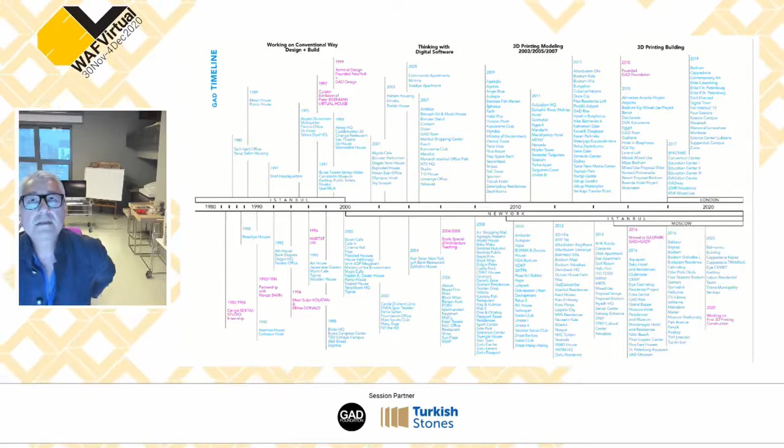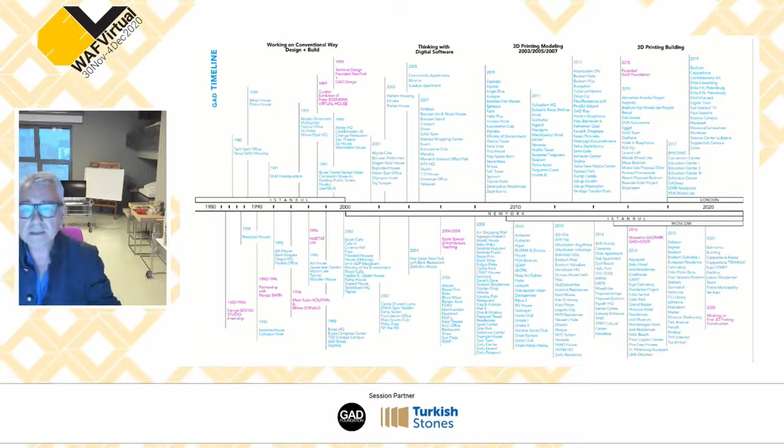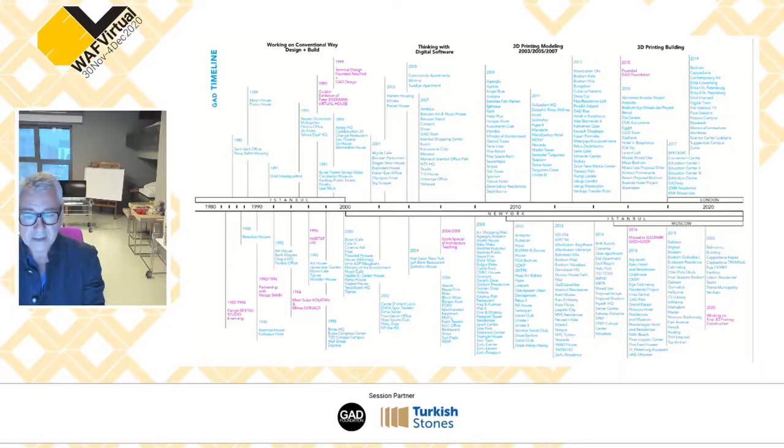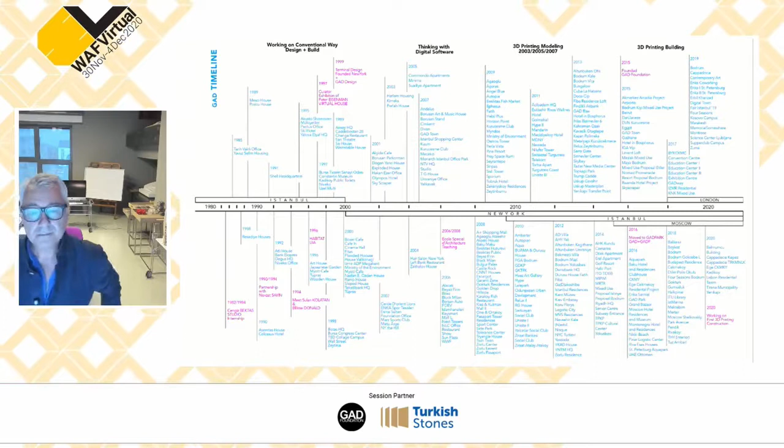Actually, first of all, I think, because when I was a small child, I visited with my family some sites, the ancient heritage spaces like Ephesus, and also Milet and Priene and Bergama, and also Cappadocia, and those kinds of places really influenced me to do something for people, or our civilization, or also explain myself.

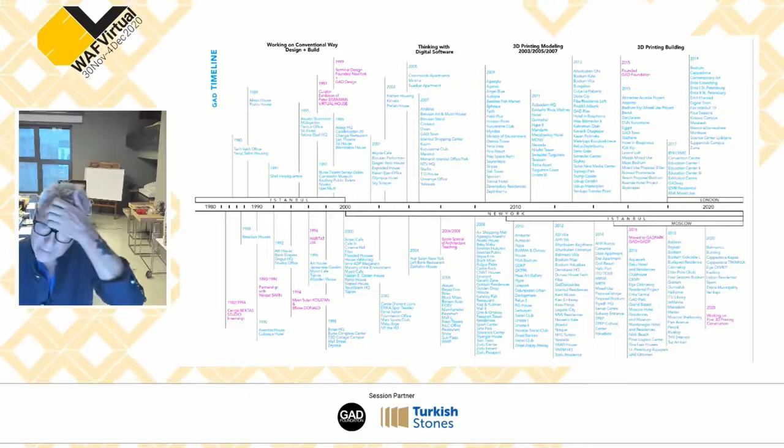Yes, actually, you can follow all the slides, please. The picture, please, next.

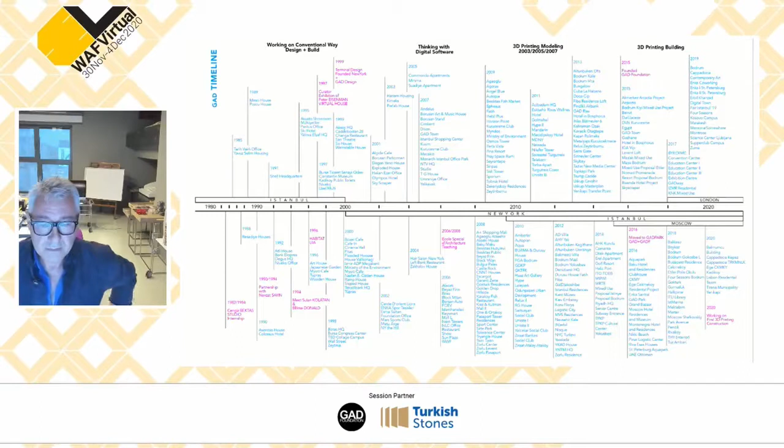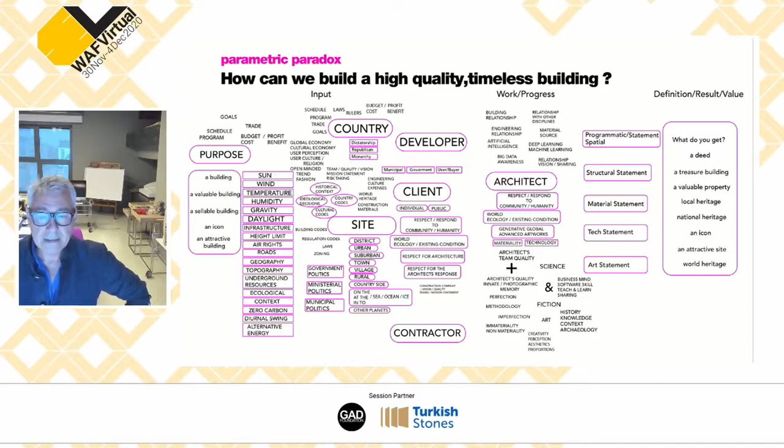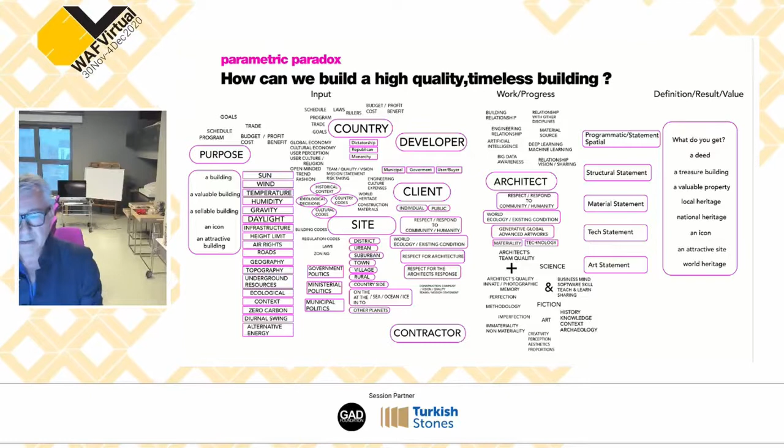Okay, what I explained before, so you can see designing something, building something or adding something on our planet is a very complicated issue, but at the end of the game, as architects, we would like to explain ourselves, our civilization, and also our idea with those kinds of statements. The stone helps you to explain your civilization, explain your idea to the next generation, because stone is normally a 30 million years old material, not produced yesterday or last week by machines. It's totally natural, and gives you ideas.

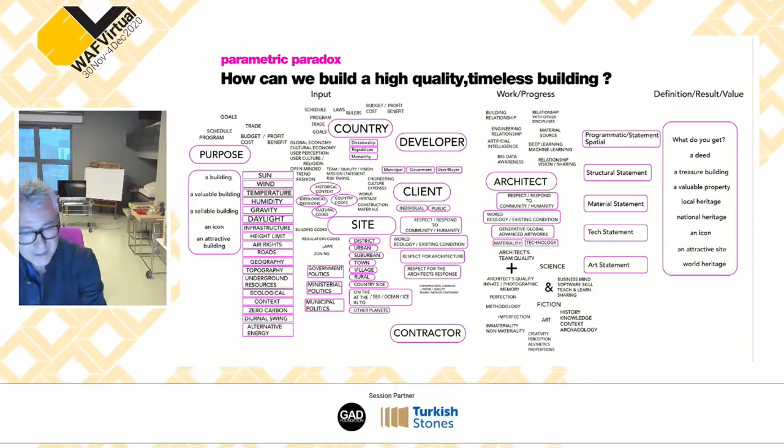Please next, please next. You can continue.

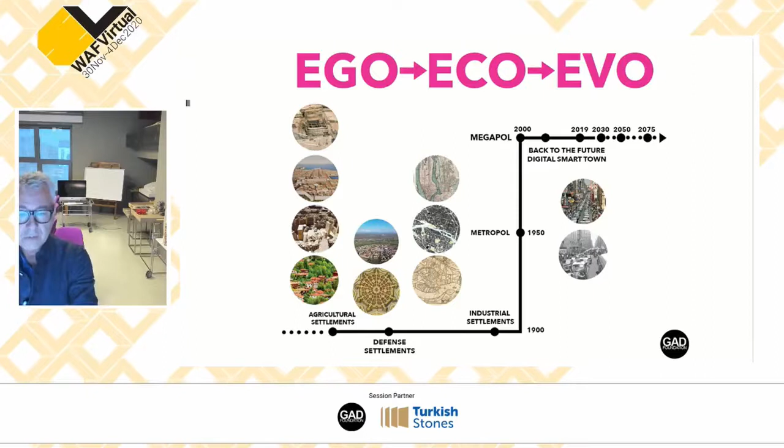And today we are interested in evolution, not only architects' statements about the ego, not the ecological things. We are interested in evolution. I would like to show you some of our projects, what we do, what we did. Please next. And we are looking now, in the pandemic time, at what is next for our future cities and our dwellings.

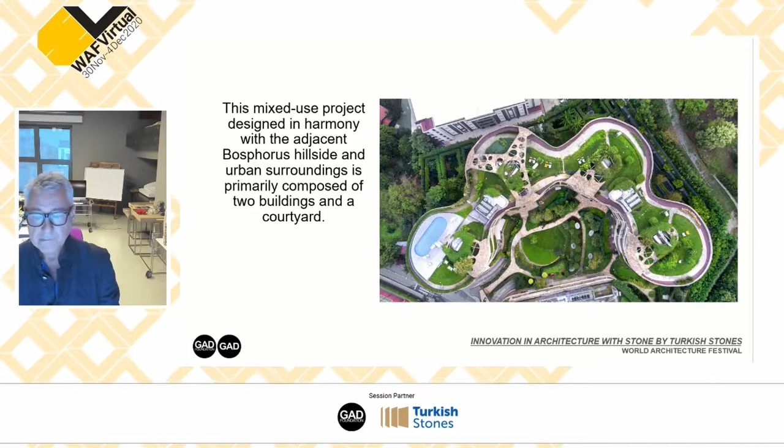We used as a material Turkish stone, let's say Anatolian stone. I prefer Anatolian stone. The name is Ünye.

Gökhan, you follow me? Try to go through this a little bit faster. Maybe Toby, if you can go automatically, just switch every 5 seconds. Yeah, let's go to the other pictures, please.

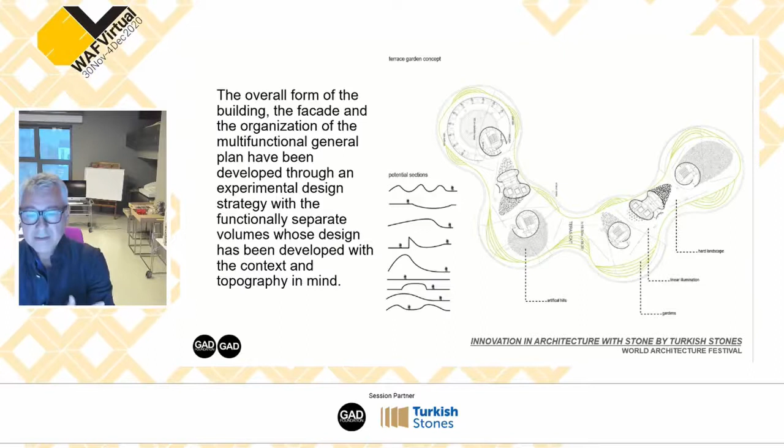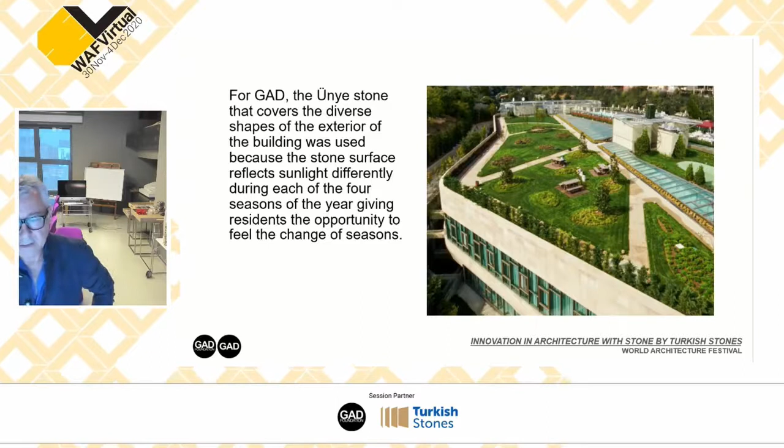You can see we made not only the housing project, we also created an envelope. Maybe it's not only the envelope, the envelope also gave our architecture not only the shape, also a garden and a 30 million years old face. Next, please.

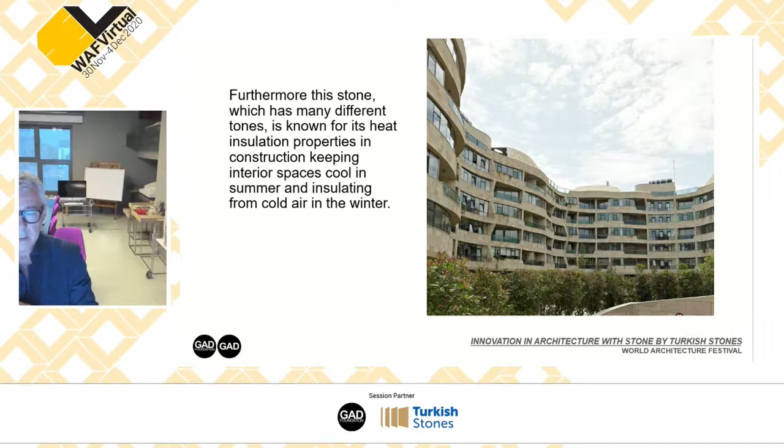Next, please. We used in those projects tools like software tools, and also physical modeling and digital modeling. And what we try to do is give more daylight, and also more daily life, not only to the envelope, also on the top of the building. You can see the sustainable life for our residents.

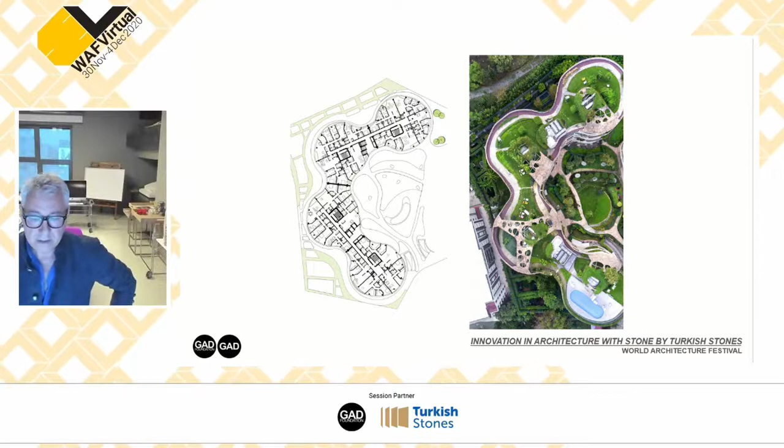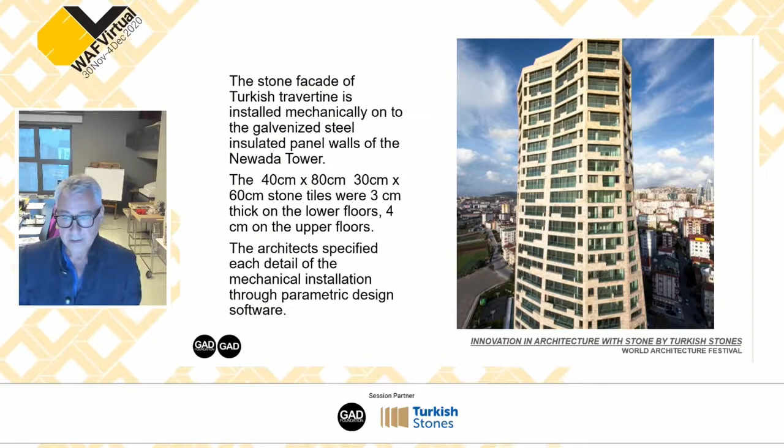Let's move forward to the other projects, I think, because time is ticking. Another project is in the same city, Istanbul. The first was on the European side; this one is on the Asian side. You can see the fantastic view, and we tried to give the building a shape, not just making a form.

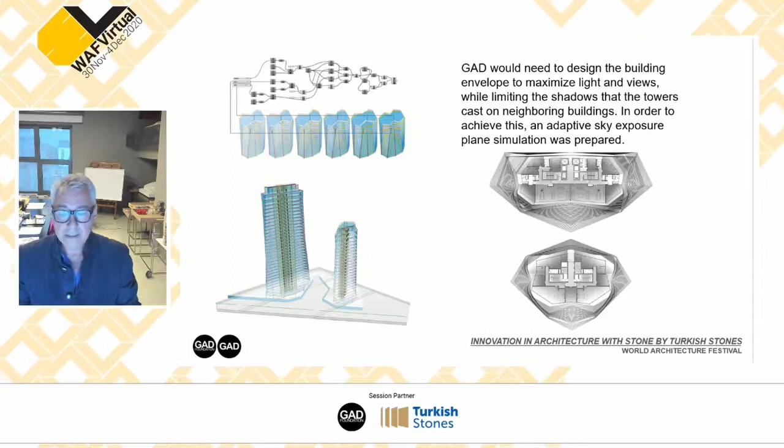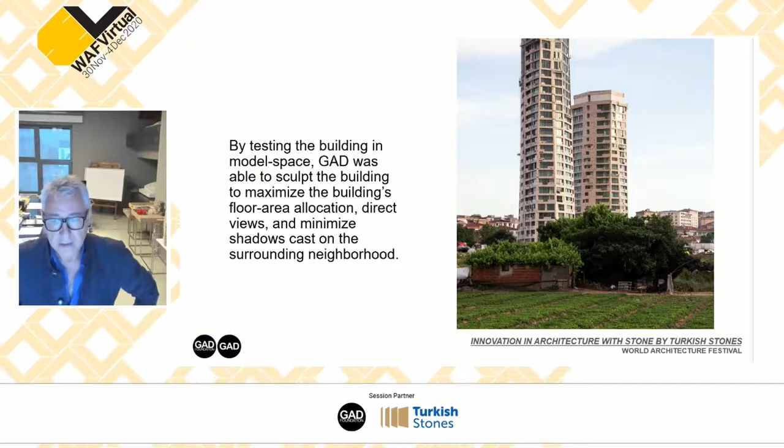Creating more light inside, more daylight, more views directed to the sea and the Prince Islands. You can see the two buildings, with different shapes. Some details about the facade systems, and more.

You know, we always discuss in Istanbul what the weather conditions are. How can we design it like New York or Miami? New York is chilly, and it's not easy to create balconies and outside life. Miami is the opposite, and Istanbul is in between. Therefore, we tried different alternative solutions: the balcony, but protected, not like New York, not like Miami, in between, let's say.

The third project is about Cappadocia.

Gökhan, if you can wrap up in the next minute or so. Next. Okay, next.

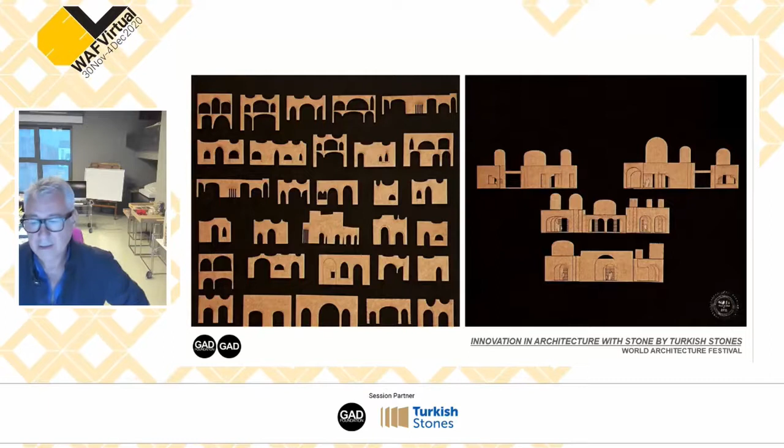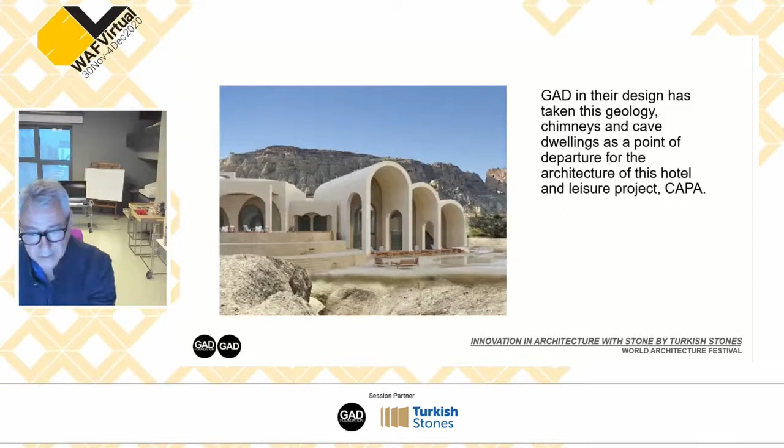Cappadocia is a fantastic place because the existing conditions are fantastic, totally made of stone. You can click on our website and see some details. It's an amazing historic area, and the earth is totally made by nature. We tried to use the same materials, the natural materials, to design something.

So here we can see the wide and deep variety of Anatolian natural stone. Here in Anatolia, in Kayseri, we have these volcanic type stones, the basalts, and here the different limestones working together.

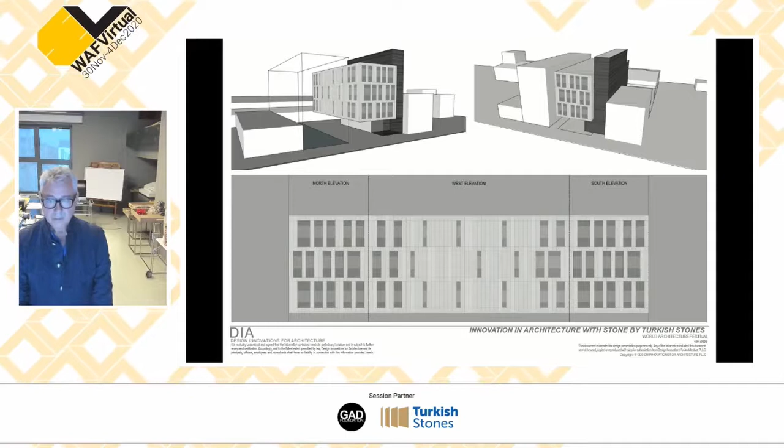Hello, everybody. By the way, my screen just went a little bit blurry. I don't know if it's the same on your end. It's a little bit blurry, yes. But go ahead if you can manage. So can we get the slides up, Toby? I think you need to switch to Nizam from Gökhan. There we go. Go ahead, Nizam. Actually the first slide was the one before this. Can we go one back? There we go. Yes, thank you.

New York City lately started having some hurricane alerts, and we thought we should be careful about this building as we designed it, because Red Hook is in a flood zone, in a hurricane evacuation zone, and this building should be quite resilient. Next slide.

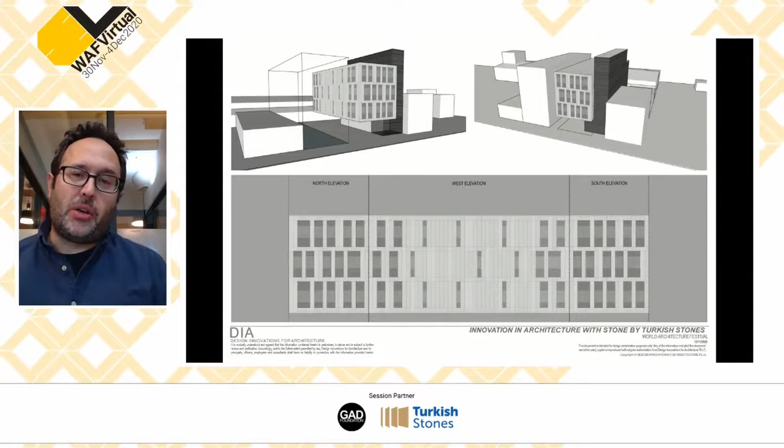So with the two going hand in hand, we looked for inspiration in nature for a material to use on the facade, which is basalt. We looked at basalt columns in nature and how we could use them almost as a reminiscent of our facade, going from more porous to more opaque in a vertical rhythm. Basalt has also been used in manufacturing and industry, so it relates to this building. Next.

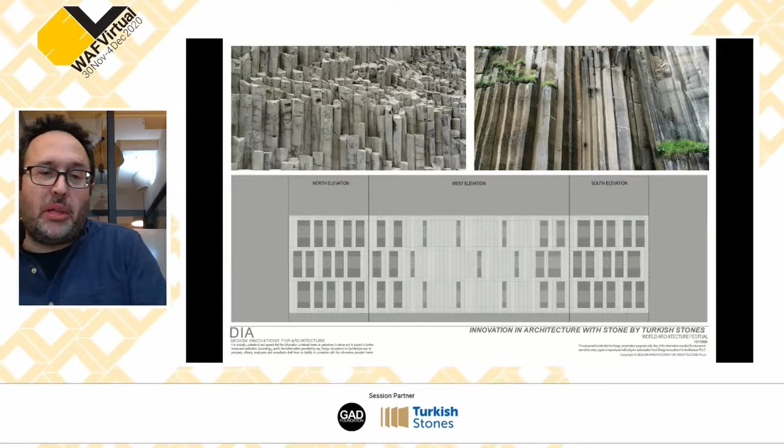We looked at basalt, diabase and gabbro. Diabase and gabbro are intrusive igneous rocks; basalt is extrusive. We ended up using diabase because of its color, to blend with other colors in the building, such as highlighting the exterior stair in red, which goes really well with the diabase color. Next.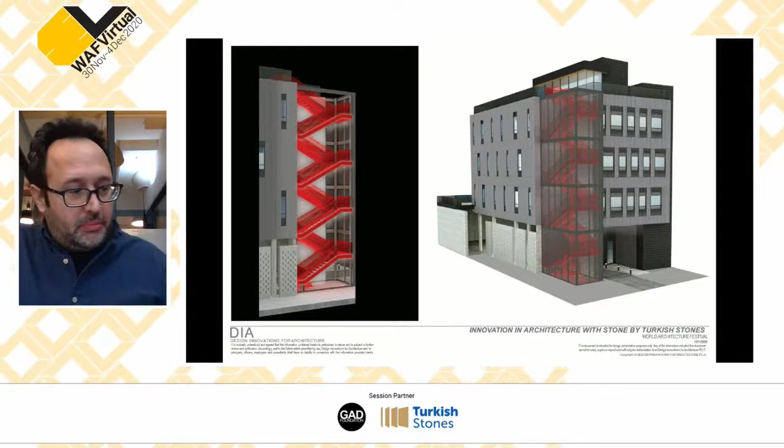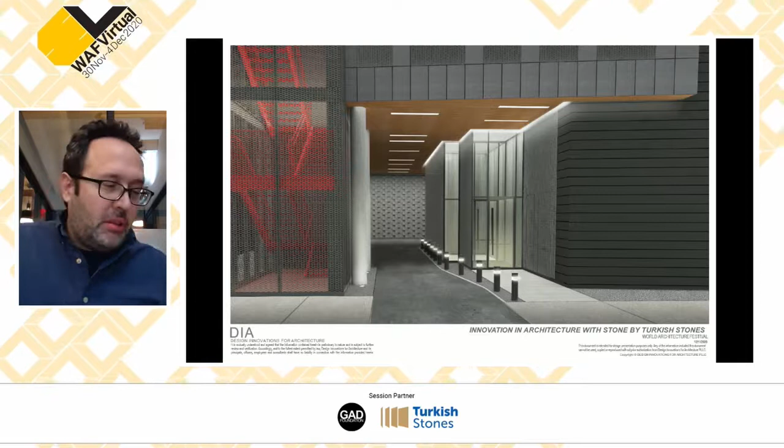So you can see the exterior stair in red color, and we also continue this contrast with the gray and the shadows and the light and the color, how they can actually create this vibrance. So one of the feature elements is the colored ceiling at the ground level, but we didn't stop there. We took it inside, where we also introduced color.

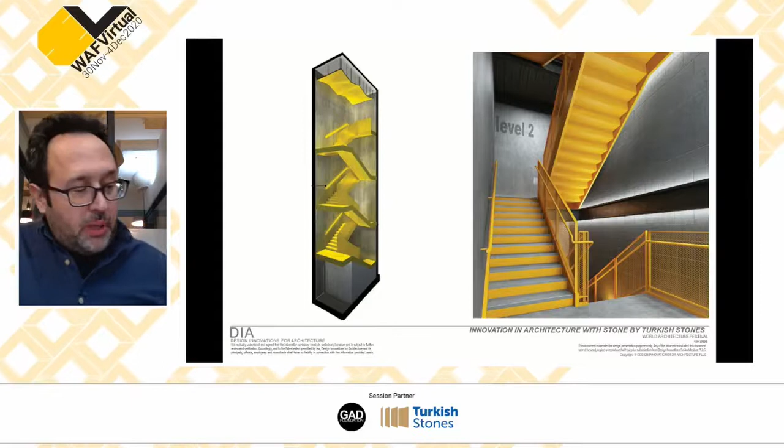Again, another feature element is the interior circulation, the heart of the building inside, and we even got carried away. We were looking at some colored shadows on the CMU blocks of the garage. We made it three-dimensional, and we tried to see if we could actually see the dancing shadows and make them in color.

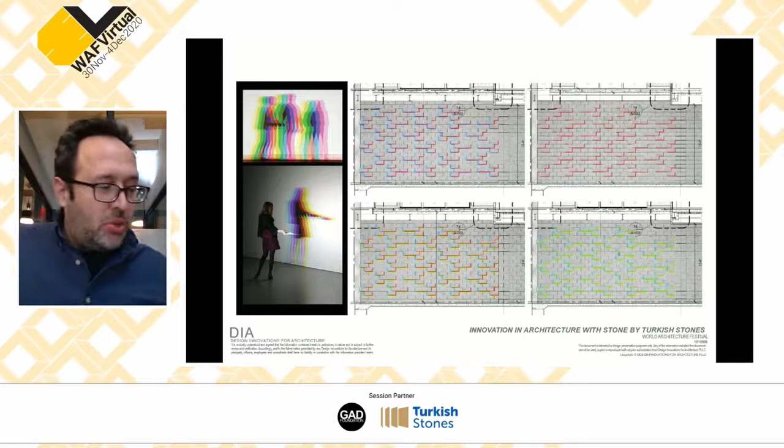But going back to the facade, as I was saying, we were looking for something resilient, and the material itself, basalt, is resilient, but the traditional cladding process of thin veneer stone cladding is not that resilient. Stone, even though it has enormous compressive strength, is very brittle, especially against wind loads, earthquake, or other blast-related forces.

It's very fragile, and to combat this fragility, the bad thing we do is we increase the thickness of natural stone. And I always believe that's kind of an irresponsible way of using stone, as it's not actually a renewable material. At some point, you know, we will actually consume all the stone on Earth.

So how to use stone more responsibly? I always like the approach where you can use the material at its most minimal amount. So we went with using an ultra thin basalt, 5 millimeters thick, bonded to and reinforced by honeycomb backing. That allowed us to create a very light stone cladding facade, and also create a larger cavity where we could have adequate insulation in the cavity, rather than behind the substrate.

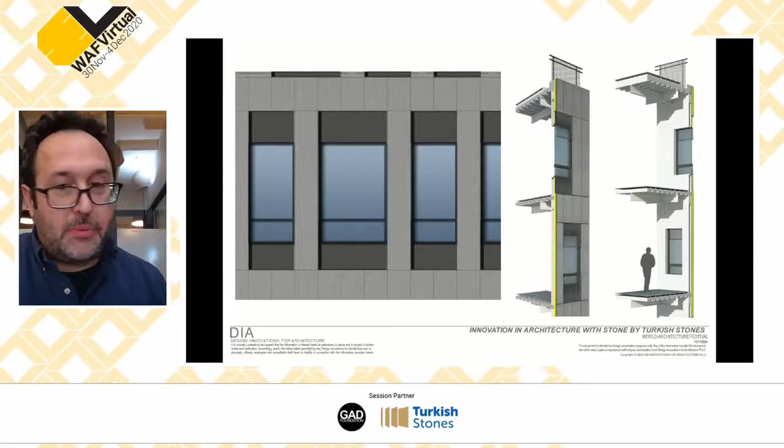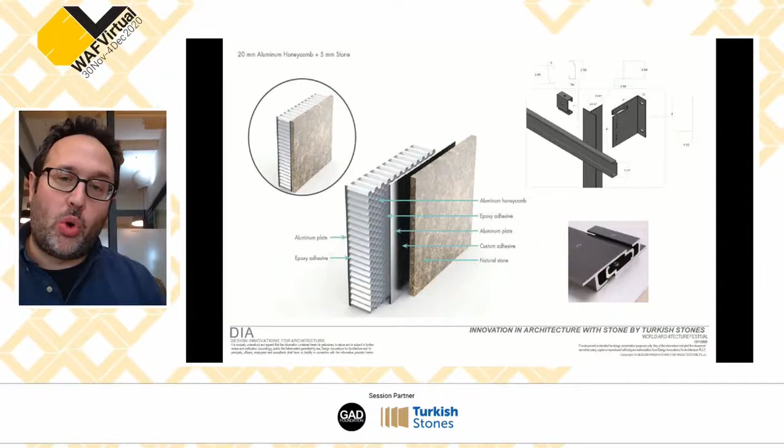So you see the assembly of the ultra thin stone layer adhered to an aluminum plate, then bonded to honeycomb, and at the back another aluminum plate, and then this is hung by clips onto the horizontal struts, and the vertical strut is connected to the brackets, which are then connected to the metal stud wall.

This is a very light system compared to the traditional use of thin veneer stone. Usually you've got to have 3 centimeter or 1 3/16 inch stone with robust steel brackets anchored to a masonry CMU wall, or again a heavy duty steel substrate. In this case, we were able to put the light stone panels directly onto the metal stud wall in our building.

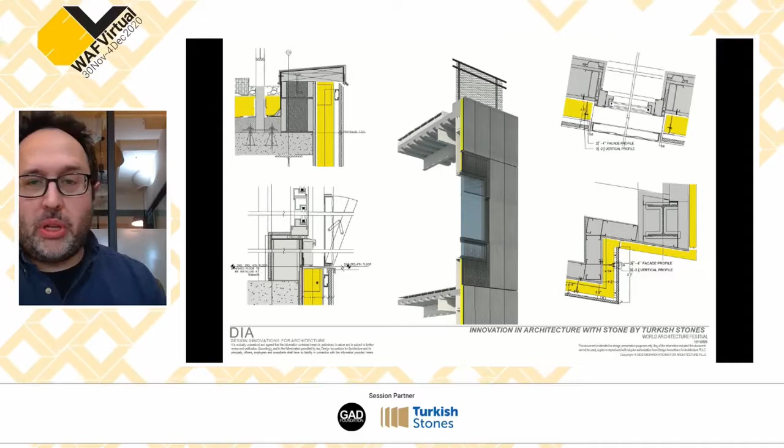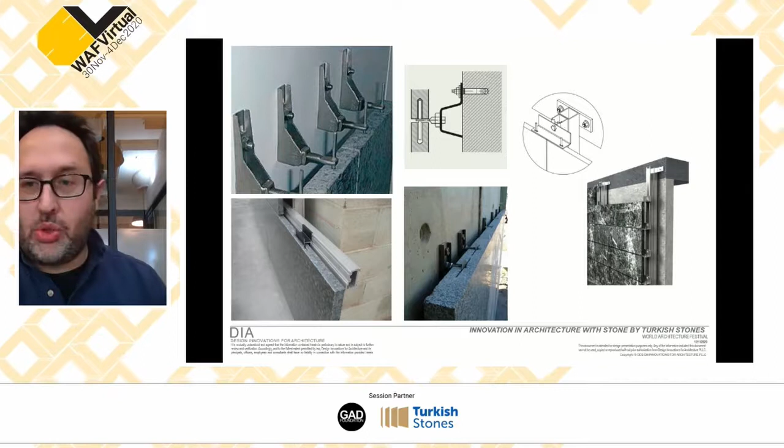Just to show you in comparison, this is the traditional stone cladding where you use mechanical fastening, and the brackets are anchored either to the CMU wall or to a steel framing system at the back. And usually when you use a conventional system, it's always safer to go with granite kind of materials; marble or travertine is less suitable for climates where there's heat differentiation seasonally and throughout the day. So it's kind of constraining. So you almost always use granite for the facades.

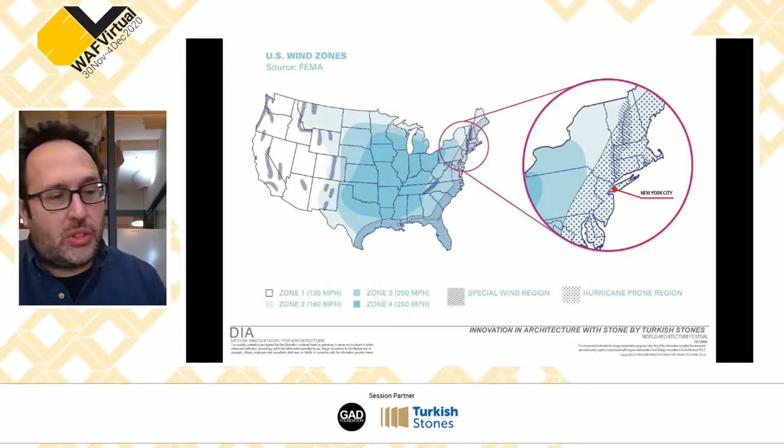So we got 2 minutes.

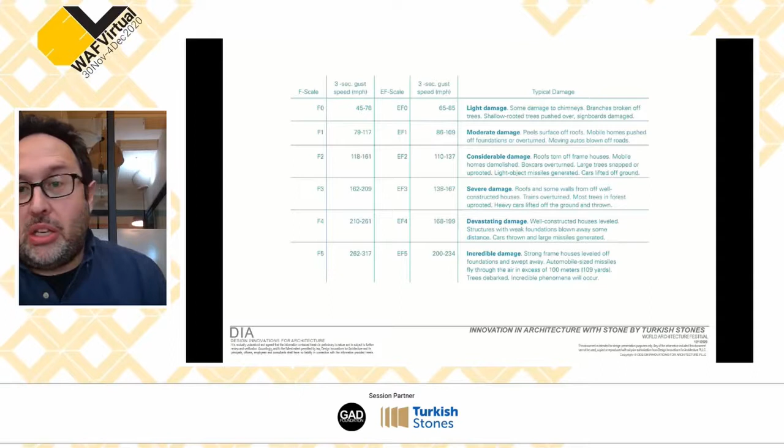And what if it's actually something more than a Category 2 tornado? Well, it's a hurricane. Like when we had Sandy that made landfall within the vicinity of New York City as a Category 1 hurricane, it caused enormous damage. So it shows that the buildings and the components of the buildings need to be ready for this.

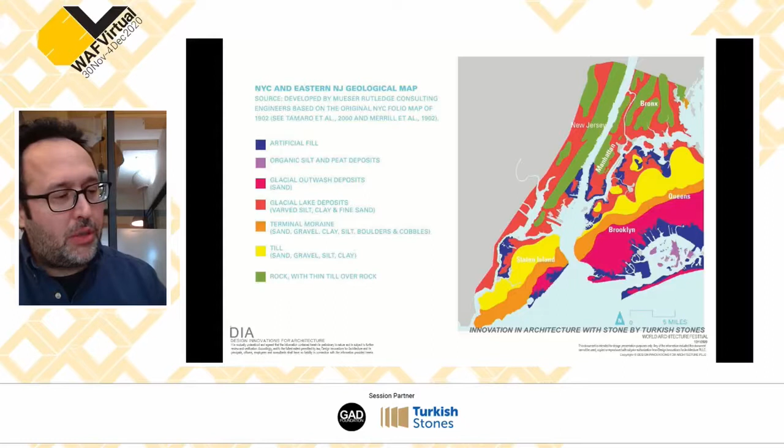That's why I'm always taking it back to this, why it was actually the right decision for us to use honeycomb-backed ultra-thin veneer stone. I think it's much more resilient. It's up to 60 times stronger than conventional thin veneer stone, and you can increase the types of stones you can use at the minimum amount.

This is also important for earthquake loads. Even in New York, there are small to moderate earthquakes, and it looks like they're going to be increasing. And for that,

Tony? Go ahead, Nizam. Go ahead, Nizam. Yeah, sorry, I heard something. So

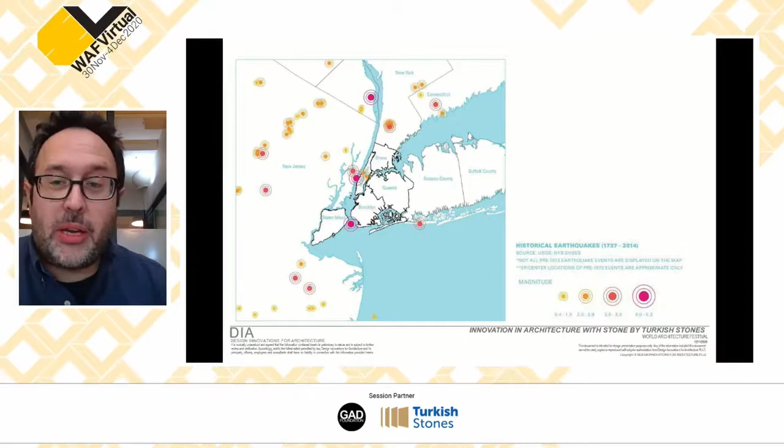The more important thing about the use of ultra-thin veneer stone is you could actually wrap it around structures in a much lighter manner, and you can create depths similar to the ancient buildings. You could actually have overhangs, soffits.

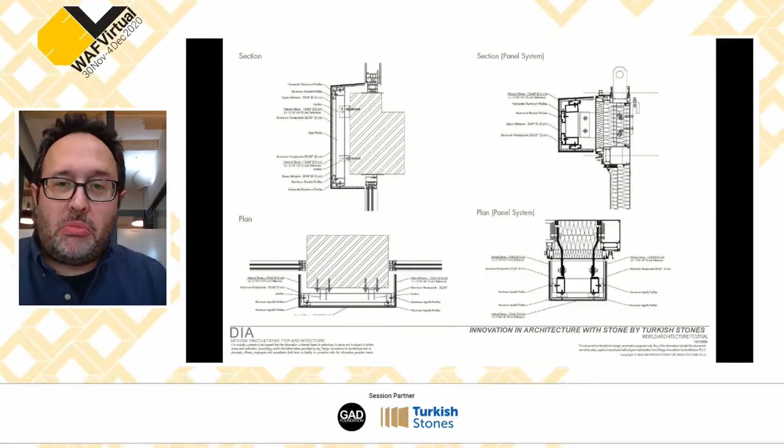So in one of our recent projects in New York City, we're studying a facade where we'd like to use stone, but not as a surface element. We want to create the depth that belongs to the times when stone created shadow and brought depth to structures. So it's bringing us back to times when stone was celebrated almost in the masonry sense, while we're using it in the most minimal amount possible.